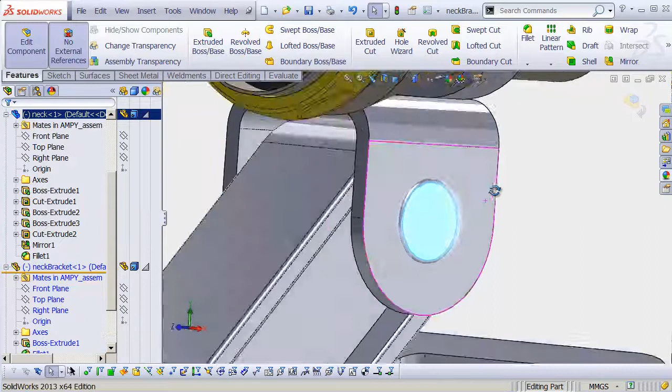We'll just keep working our way around the part, cleaning things up and adding detail as necessary. I'll right-click and edit this part in context, drag this face out to make it a little bit wider, and it looks like we need a bulge here to make room for this bolt thing sticking through.

So let's select this guy and create a sketch on that face. I'm going to zoom into it some. I'll create a circle and snap it to the center of this other circle, keeping in mind that I have my No External References box checked, so it's not going to create any references to external geometry—it's just going to snap there nice and conveniently.

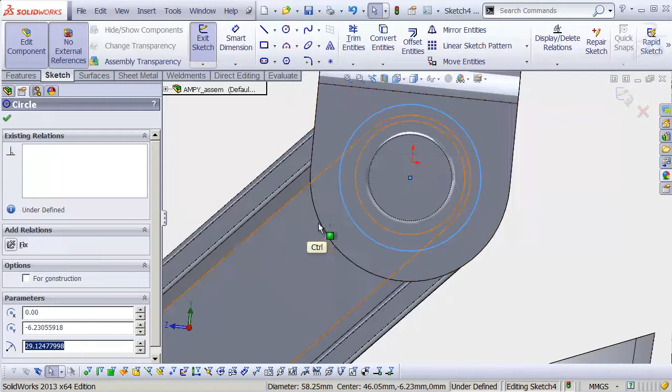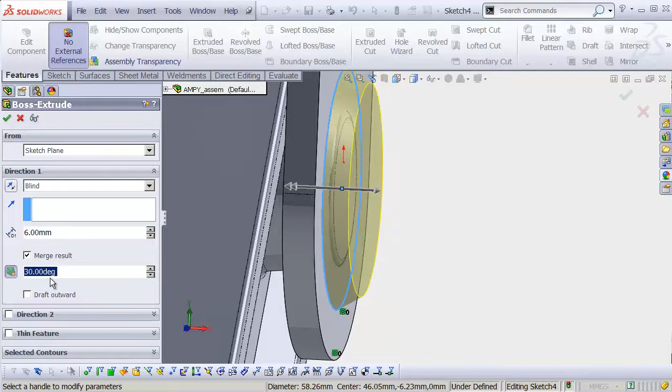Now I can take this outer edge and reference it to my existing bracket model, making those concentric so I know it's going to always stay right where I need it. Then do Features, Extruded Boss, rotate around here. I don't want to come out very far—I want this really shallow. Then I'll turn on that draft again and make it really extreme, like 30 degrees. Hit OK. Now we have a little bulge there to make room, and that looks kind of mechanical. That's fine, and then we'll mirror that across.

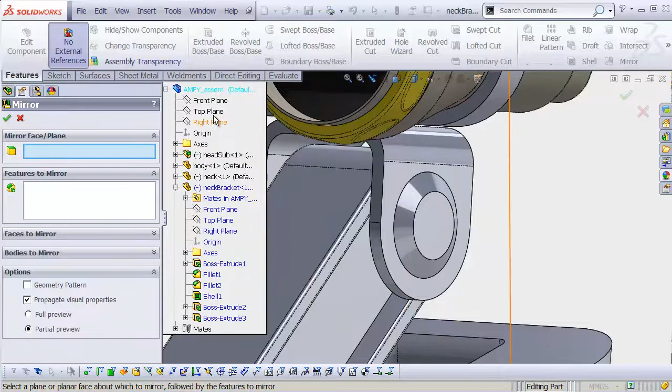I'm going to grab my mirror tool in the Features toolbar, drop down this list, and grab inside my neck bracket. We'll grab the right plane—and importantly, we're not grabbing the right plane from anything else, we're just grabbing it from the current active part. Under Features to Mirror, we'll grab that Boss Extrude and hit OK. So now we have that on both sides.

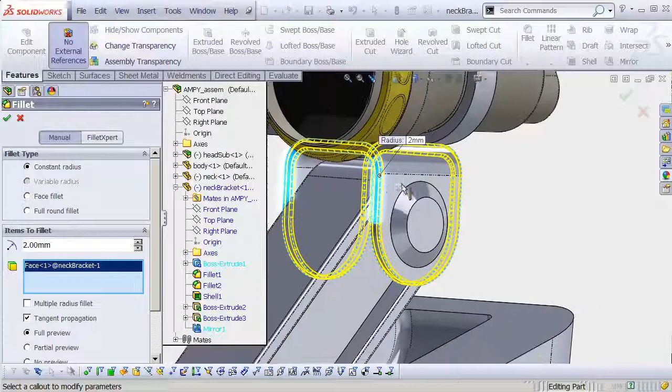Perfect, so let's just fillet this guy. I'm going to fillet these edges by 2 millimeters, as I've been doing on most other things. That's actually looking pretty big—maybe I'll set that to 1. That looks a little bit better.

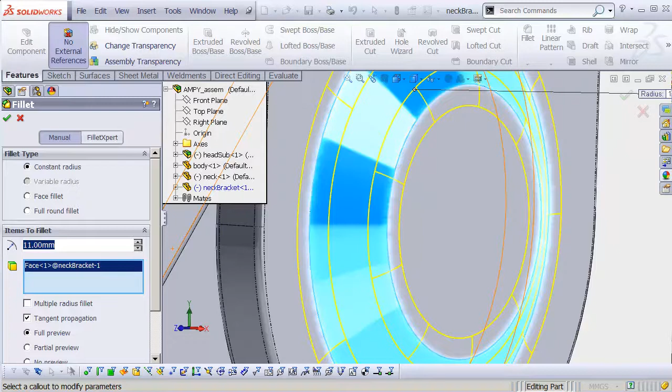And hit OK. Now, one thing you'll find is that fillets on very shallow angles like these tend to need to be a lot bigger. So if I grab my fillet tool and click on this face, my 1 millimeter fillet looks really tiny, so to be able to see it I may need to crank it up a little, say to 11 millimeters—that looks better. I'll get that one, and then this one on this side as well. Hit OK. Now those are rounded off all nice and shiny and neat.

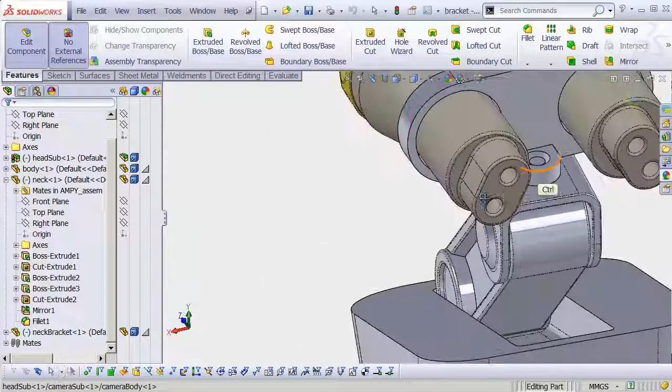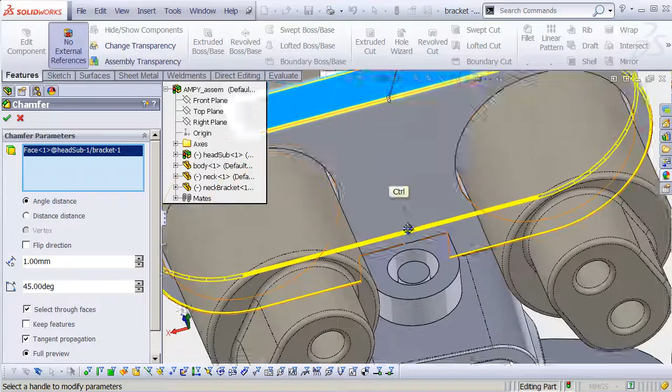That looks good. Let's right-click on this bracket up here, edit that part as well. Let's get a little bit of detail into this guy. Now, instead of the fillet tool, let's head up to the fillet tool and drop it down—we have a chamfer tool. The chamfer tool is basically like a fillet, so I could click this face and it'll do both sides of it just like a fillet would. I'll set this down to, say, 1 millimeter. But instead of rounding it off, it's going to file it off at an angle, so we get this perfect little chiseled edge right around there, which can look pretty darn cool.

We'll set this to maybe 1.5 millimeters and hit OK. So we have this nice little highlight edge. Chamfers are cool visually because they catch highlights in really interesting ways.

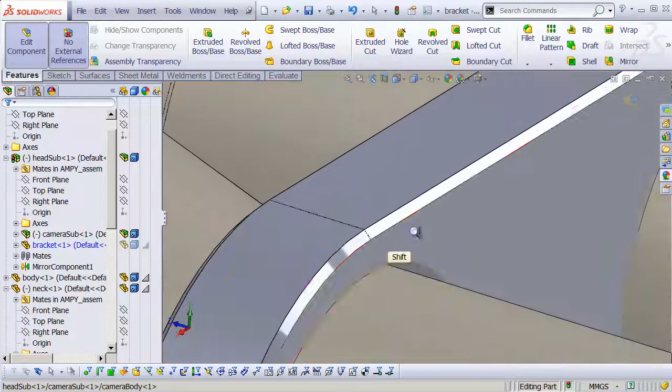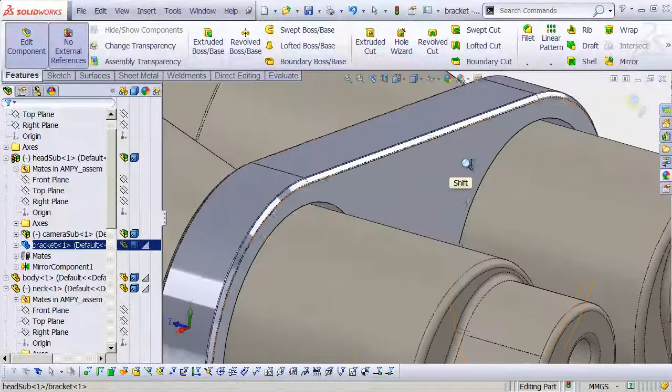And if we want to really tighten that up for whatever reason—say we're going to render this at super high resolution—you can still take a fillet at a constant radius, and then hit those edges with a very tiny fillet, like a 0.5 millimeter fillet on either side. This is overkill in most cases, by the way, but it can look really nice if you're going to render at really high resolutions—those things do start to matter. So we'll take these edges in here—actually, I'll just grab this whole face on the inside, both of those, and we could set those to 1 millimeter for sure.

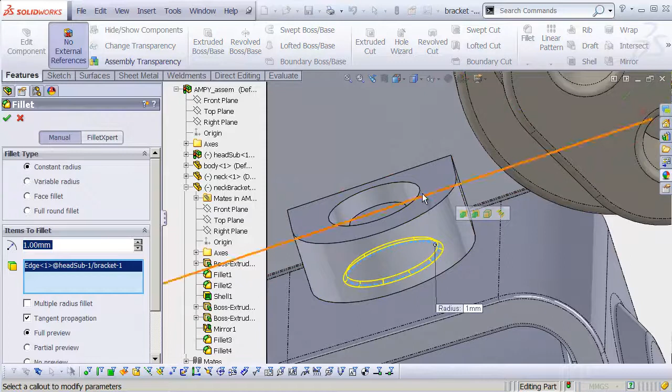Hit OK. And then finally, we'll get this last stuff down here at the bottom. Why don't we grab our fillet tool, and that edge, and this face right here—we'll get all of that stuff. Might even take... no, not that edge. There we go. All right, that looks good. That stuff's starting to look really tight. Let's move down and finish up this base.